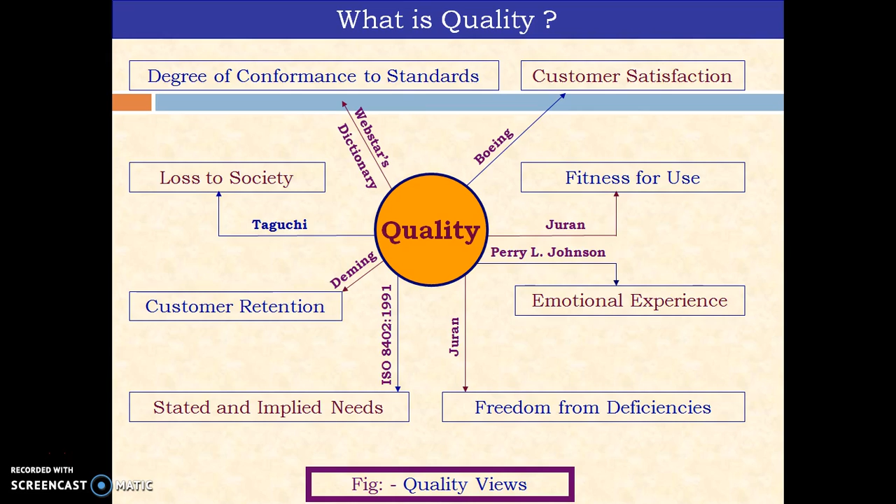Now we will understand the concept of quality control in this session. Actually, in the last session, we had tried to understand the different definitions of the term quality, which is a very relative term. Dr. Juran has defined it as fitness for use. He has also defined it in another way as freedom from deficiencies. Dr. Deming has defined it as customer retention for business. So likewise, we also understood so many things related to the term quality.

And the loss because of poor quality is in terms of loss of business, increasing liability, reduction in productivity, and increasing unnecessary cost, which could be a result of this poor quality. And the result of good quality from the customer and company perspective is also mentioned here.

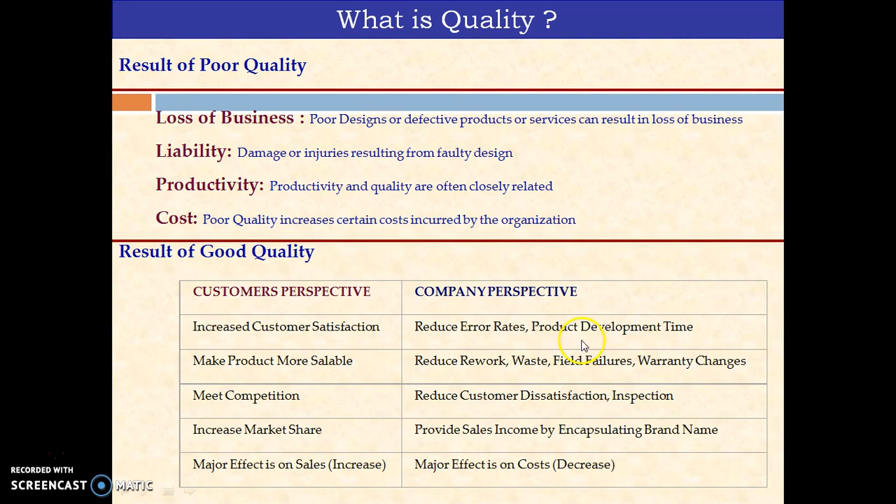Now, our objective here is to understand why there is a need for the term control to be added to this quality. We understood at this stage quality is a different perception, it could be different characteristics, it could be pride of ownership for different people. The manufacturer is interested in the quality of the product he has produced. From the customer's point of view, he is interested in the quality of the product that he purchases. Altogether, quality can be summarized in terms of products or services that meet certain defined targets.

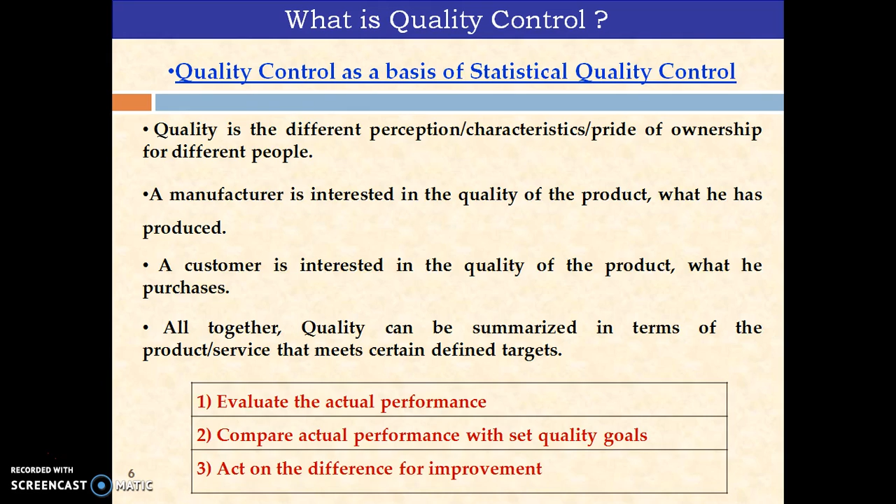What is quality control? Actually, it is all about the process of evaluating the actual performance of the product or process under evaluation, with the objective to compare it with its set level of performance. If any deviations are observed, work upon reducing that deviation, ultimately to improve the quality. This is the thought process we should understand for understanding the term quality control.

I'll take an example here, a table fan. What does quality mean for a table fan? For a customer, it should work. Whenever he purchases it, it should work. Another very simple example, a packet of chips. If you consider it as a product, then quality could be the taste of that particular chip. It could be the certain amount of chips present in that particular packet. It could be like that.

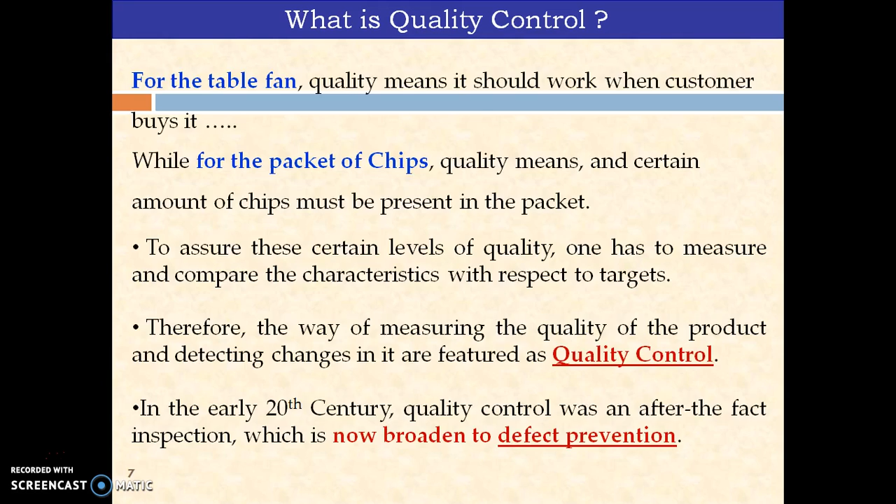So to assure a certain level of quality, one has to measure and compare in a quantified way the characteristics with respect to the target. And therefore the way of measuring the quality of the product and detecting the changes in it can be featured as quality control. In the early 20th century, quality control was only limited to the act of inspection. Now it has broadened its horizon to defect prevention also by offering quality assurance. That's a different concept, rather an extended concept. We'll see explanations about quality assurance in further sessions.

Now here we are trying to define the term quality control. The American society has defined it as a mechanism by which products are measured up to the specifications determined from customer demands and transformed into sales, engineering, and manufacturing requirements. It is concerned with making things right rather than discovering and rejecting those made wrong.

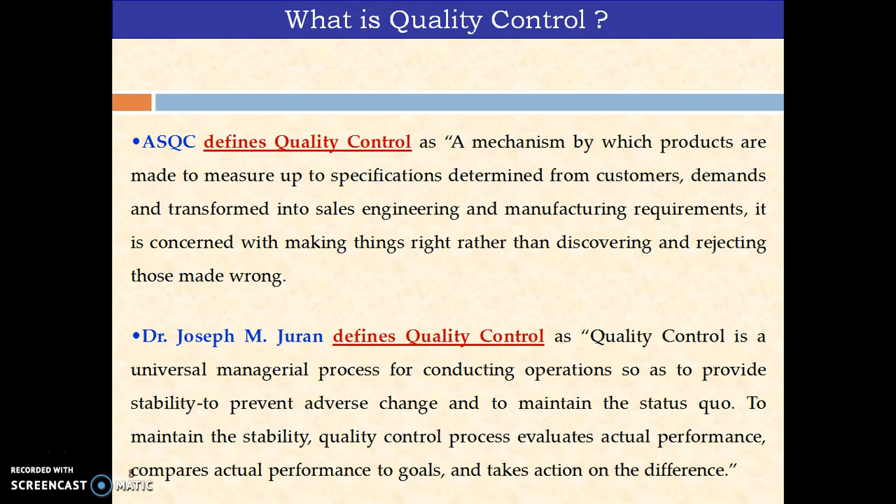The other way of defining quality control is with the words of Dr. Juran: quality control is a universal managerial process of conducting operations so as to provide stability, to prevent adverse changes, and to maintain the status quo. To maintain stability, the quality control process evaluates the actual performance, compares actual performance with goals, and takes necessary actions on the differences. So from these two definitions, what we can understand is that it's all about the process, which I tried to define in the form of a simple flow chart here.

The first stage is to select the limits of the process. The second step is to set the performance standards. Then identify the ways of measuring the deviation. The next is to measure the actual performance and compare it with the standards. There are two decisions: whether it is matching or otherwise. If it is matching, accept; if it is not matching, it is not acceptable, so act on the difference. Now if you look at this particular flowchart, this portion is all about quality control.

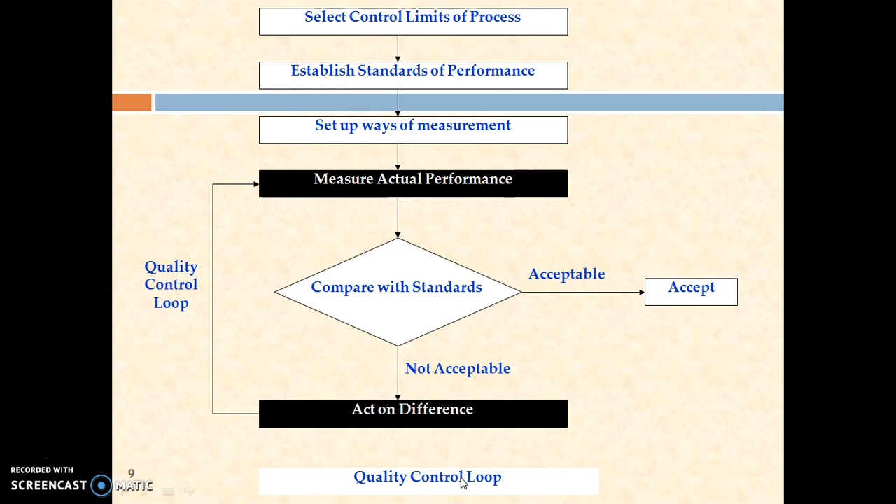The major portion of your quality control lies here: understanding the actual performance, comparing it with the standards, and acting upon it. And so the process defined here in the form of a flowchart is all about corrective actions on the differences. Right?

Now what will it do? It will ensure the control on the quality parameters. Actually, you are controlling the quality over the process and avoiding the same getting repeated in the next cycle of quality improvement. Actually, Dr. Deming has defined this cycle of analyzing and making the corrections. So he defined this PDCA cycle first.

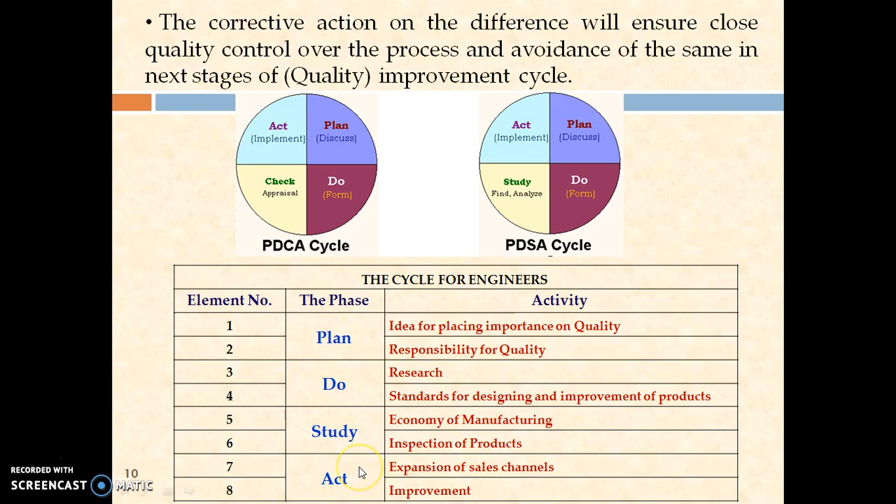Actually, Dr. Deming has said here that improving quality does not increase cost, because there is always a misconception that use of quality control activities may lead to increasing the cost. No. How? We'll see. As we work on eliminating the deviation, cost decreases because of less rework, fewer mistakes, fewer delays, better use of machine time. So ultimately it yields improvement in productivity.

Once you talk about improvement in productivity, it may give opportunities for expanding your market share with better quality, lower price, maybe lower defect rates, diversification in your product with features. That could give time and other resources for doing innovations. It will help you stay in the business. It provides more jobs and improves quality further. This is a kind of quality spiral that he has explained.

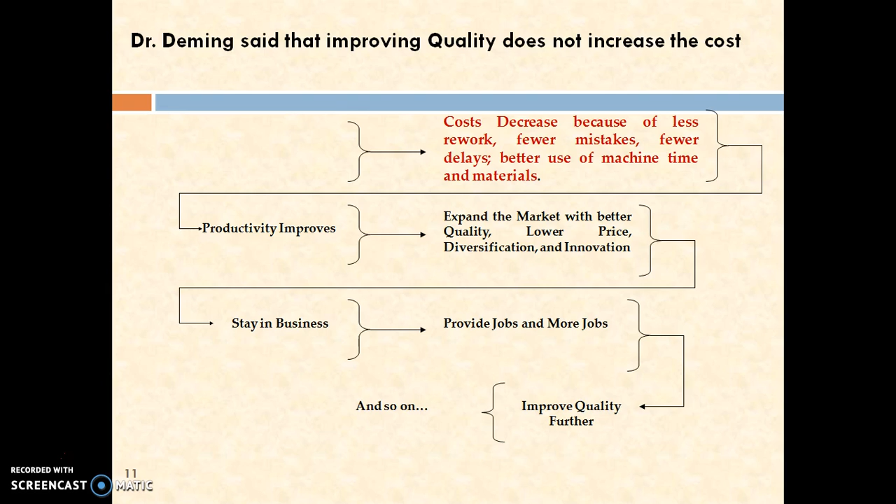Now in this process of quality improvement, this is the region where you can see the importance of the concept of quality control, because here cost reduces because of less rework, fewer mistakes, fewer delays. When you actually work on the product or process to avoid the deviations, you are doing quality control activity. So there are different techniques and tools defined as quality improvement techniques, quality control techniques, quality control tools. The very famous basic 7 quality control tools are shown here.

For example, the 7 QC tools: cause and effect diagrams and flow charts. These cause and effect diagrams help you establish a relationship between different causes for deviations. Flow charts again help you with the same. Check sheets, histograms, a kind of graphical representation. Similar graphical representation, Pareto, will help you prioritize your activities for quality control. Then control charts are one of the most extensively used QC tools all across the world.

Scatter diagrams help you understand the relationship between the parameters which may affect the parameter under consideration or your quality characteristics, right? So relationship analysis you can do using the scatter diagram. Likewise, there are many different types of quality control tools available. I've just discussed here some basic 7 QC tools, right?